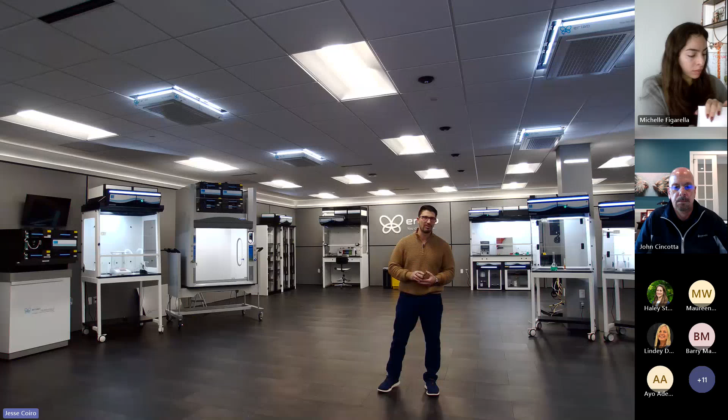I promise this is not going to be death by PowerPoint. We're just going to be as authentic as we possibly can be. But first, I want to make a quick introduction. So Jesse Coiro, Erlab, been with the company about 14 years, director here, and really have focused my career on contamination control and environmental control services.

So what Erlab does is we provide contamination control solutions for the protection of laboratory personnel through the power of filtration. So everything you see behind me within our Inspiration Center is powered by filtration, meaning there is no HVAC necessary within the building at all with any of our products. So independent, completely flexible, and provide solution wherever the chemical needs to be within your organization. Some key benefits to this technology obviously is the flexibility. It's not tethered to the building's infrastructure, and the sustainability aspect.

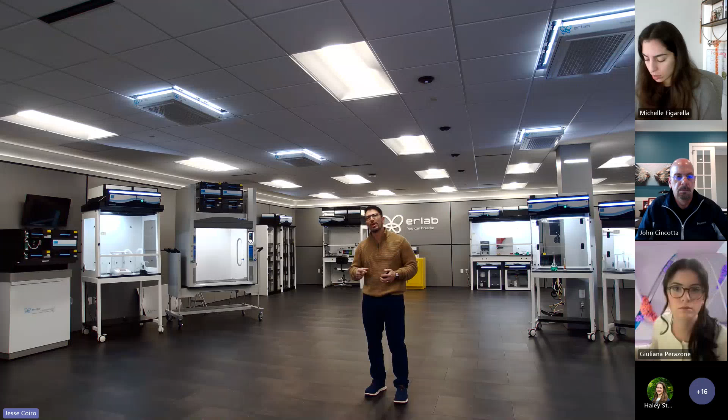Why sustainable? Because we're conditioning the air that you're already bringing to your facility, and we're capturing at the source within molecular filtration or within our HEPA filters. And we're not throwing that polluted air out into the environment and therefore having to remake up already conditioned air, which is extremely costly. Our biggest product that I want to talk a little bit about today specifically is our ductless filtering fume hoods.

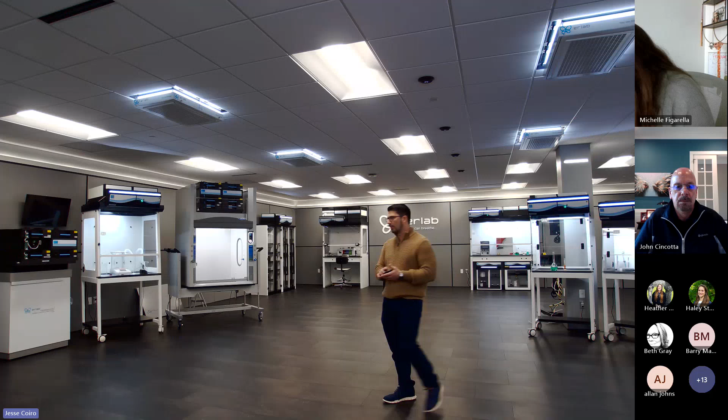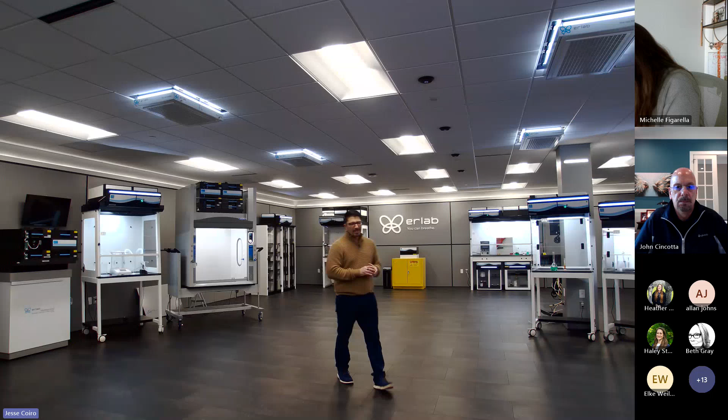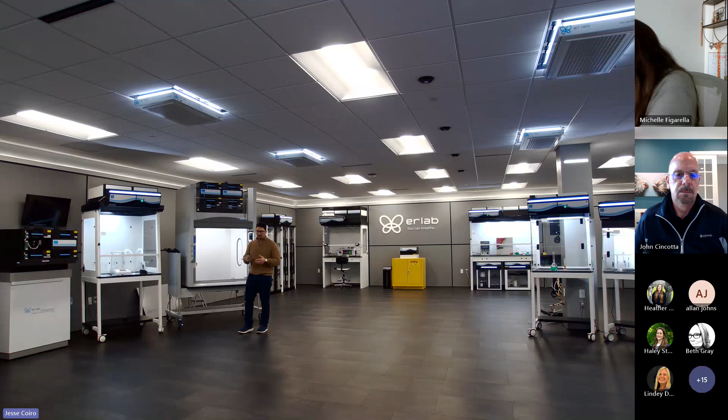Fume hoods themselves consume about 3.5 times of US homes. Filtered fume hoods, however, reduce the energy consumption by about 94% in energy and your overall CO2 emissions. So it's extremely sustainable. Many people think that filtered fume hoods aren't safe. There's a big misconception there. And the reason being is because we bring air back into the laboratory that we're conditioning, that we're working on chemicals at the source. Again, one of the misconceptions is, well, how can you guarantee safety? Safety is absolutely guaranteed with our filtration technology because we've been doing this for 57 years.

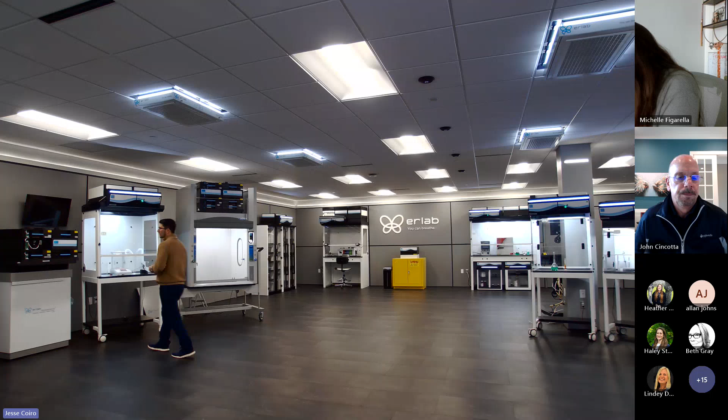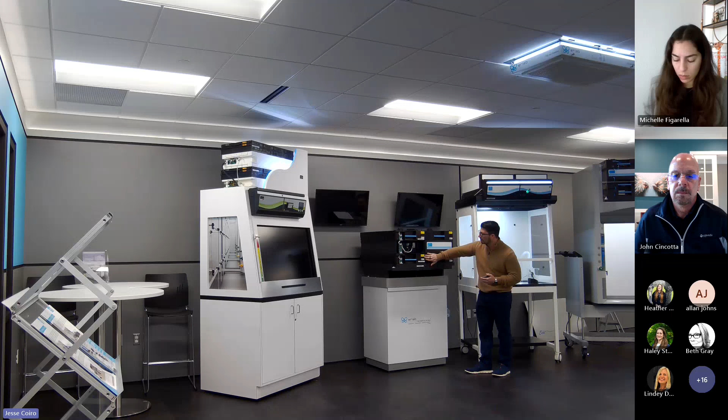I'm going to bring you over to the filtration columns and the stacks here to show you exactly how these are integrated. Sorry, I couldn't see myself on the screen. So again, one of the misconceptions is, well, you're bringing in polluted air, you're capturing it in the filters, and then how can we guarantee that what's entering that laboratory is safe? Well, with Erlab proprietary filtration technology and detection and communication capabilities, we have the ability to handle a broad range of chemicals. We have a primary filter layer. We have a fan module system, and inside this system, we have sensing capabilities as well as communication capabilities. Then we have a secondary redundancy layer of filtration.

What we don't see here is potentially a HEPA filter as a primary source of filtration, or a secondary HEPA filter in the event that these hoods are stored in a contamination controlled environment so that we don't compromise the integrity of the cleanroom. Now, when we capture chemicals, we always want to capture it within that primary cartridge. We want to detect after that primary cartridge, and we want to have that secondary filter really as a buffer in the event that there's any breakthrough, but we never want breakthrough to exist.

So the way we detect that is we have dry contact metal oxide sensors. We detect VOCs, formaldehyde, and or acids, or a combination of all three, depending upon the technology. In the event that we see a spike in concentration past this primary stage of filtration, we're detecting it within our sensors. And we guarantee that even at detection phase, they'll never be released exceeding 1% of the threshold limit value at the filter's exhaust.

Now, how do we do this? Well, we have a list of over 700 chemicals we've tested under 6 different concentrations twice. It represents thousands of chemicals. Not only do we know what we can retain, we know down to the molecular gram of those chemicals we can retain before we see release not exceeding more than 1% of the threshold limit value.

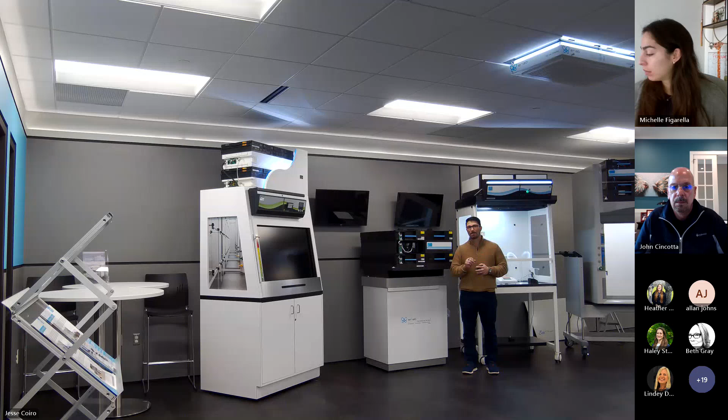Hang on one second, Jesse, you got muted. I can't unmute you. No, no, I can't hear you. Are you able to unmute from your side? Hmm. Is that better? Yes, there we go. All right, I don't know how that got muted. Apologies. So I don't know where I left off, Heather, if you could help me. Oh goodness. So it was testing. Perfect. I failed my test. All right, I'm going to start back on the feasibility study. You were talking about chemicals, the chemicals we can't retain.

Okay, so I was talking about the chemicals we can retain, but more importantly, we also know what our limitations are, and it's 13 chemicals. Those that are normally gaseous under normal temperature and pressure conditions, or noble gases. After that, it's about the overall quantity of chemical that's being used. We can handle about 80% of the applications within laboratories today. It's really about overall volumes, and we work with our customers to help understand what that application is and reduce their overall volume and usage of the chemicals.

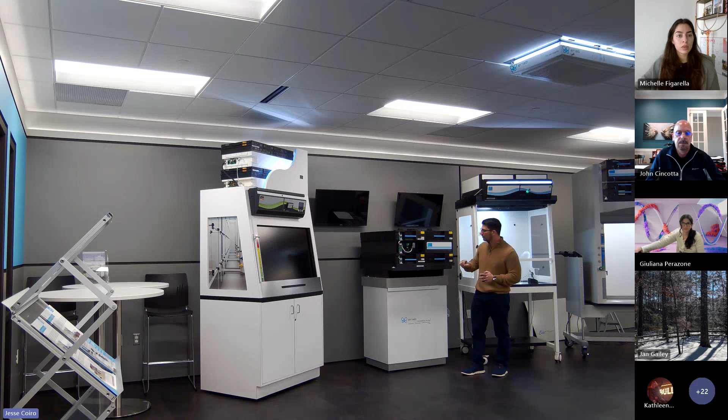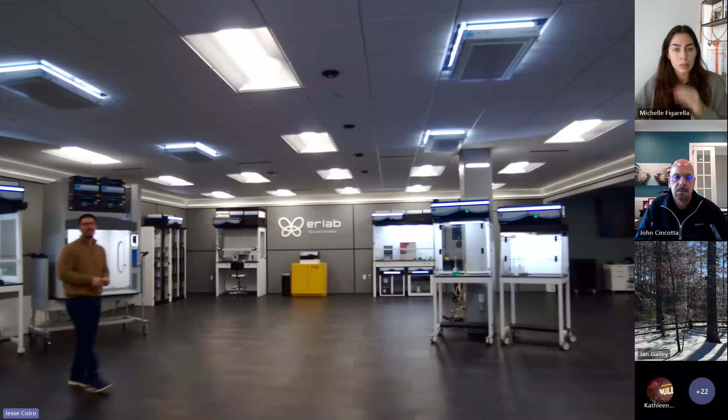It's important to note that when you replace the filters, the primary filter is the filter that gets disposed of, that gets removed. The secondary filter rotates down to become the primary. The new filter becomes the secondary. So that's the safety aspect of the technology and how the filters work and how we're able to guarantee your safety. First and foremost, if this product wasn't safe, then what good is the product at the end of the day?

In addition to the fume hoods, now we know we have a hierarchy of controls. We want to separate you from the hazard. That's a containment device, an engineering control device, such as a fume hood. We have many different products, as you see, many different fume hoods. We have our standard, what's called our Captair structure, single wall constructed fume hood. You have what we call a reversal sash. So not your standard research grade fume hood, but it does the job for the majority of applications.

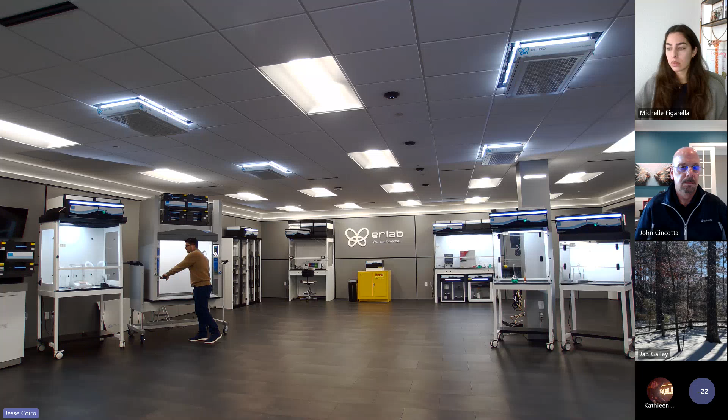We also have partnerships with Labconco where they integrate our filtration technology above onto their superstructure called their Echo and Aero. And this gives you a traditional sliding sash. You have your gooseneck faucet, your sinks, gas, water in the back. So there's a lot of different things you can do.

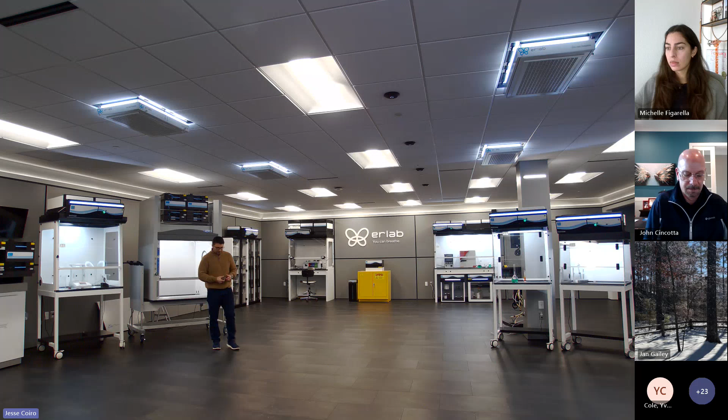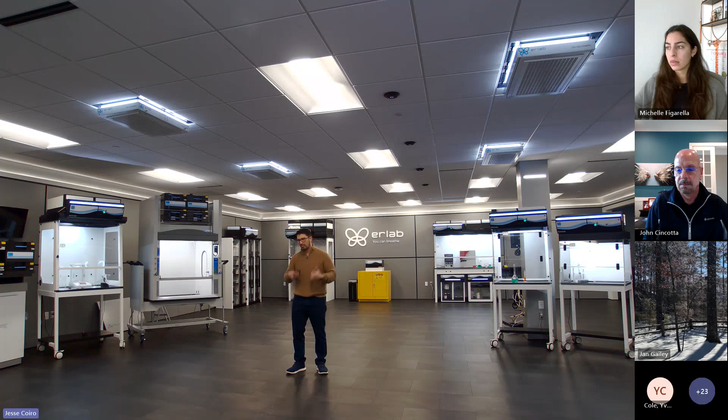Now, earlier I mentioned providing protection wherever the chemical exists in a laboratory. Well, as you see, we have a number of different solutions. Above me, that little device called the Halo, hence the halo of light around that product. That is designed to mitigate the risks of fugitive emissions in a laboratory by providing continuous filtration and adding what's known as equivalent air change rates in your room.

Sorry, somebody just asked a question about OSHA requirements. I'll touch on the safety standards in a moment.

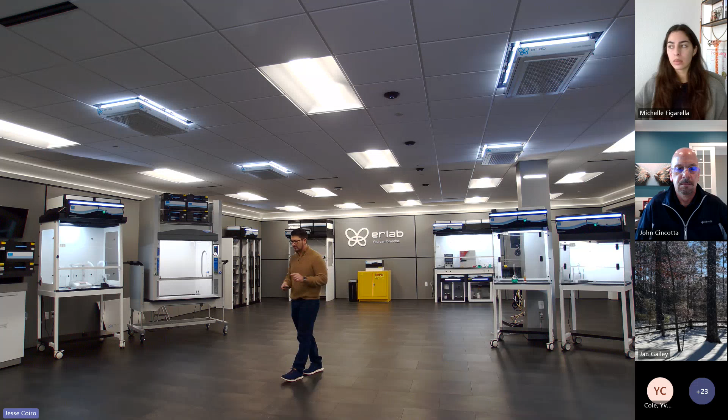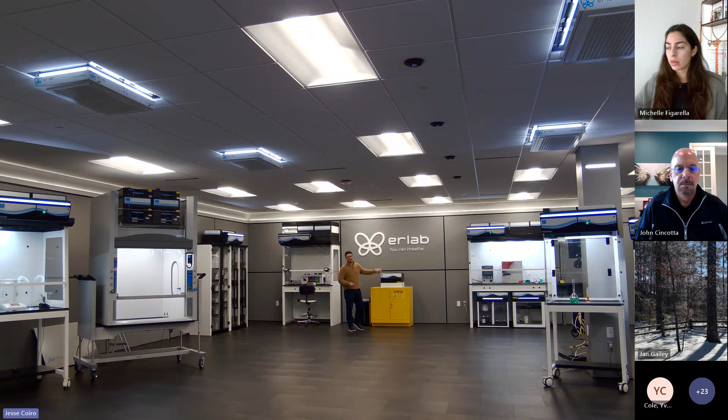Then we have filtering storage cabinets, devices, and we have what's known as an integrated solution on flammable or acid cabinets known as the ChemTrap. This integrates onto any existing acid or flammable cabinet in your facility, and it constantly filters out the emissions in that cabinet. We know those are the most stagnant chemicals in a laboratory. When you open up those cabinets, you're inundated with emissions. Now, we know the EPA is setting strict guidelines, especially for DCM, methylene chloride, where

Jesse, you got muted again. I don't know why that keeps happening. That's okay. Sure. Anyway, no worries.

Here we are. So again, EPA regulations are extremely strict, right? So before, methylene chloride, DCM, had a TLV of 50 ppm or 25 ppm, depending upon the guidelines of the country you're in. Today, as of December of 2024, the EPA states that you can't be above 2 ppm. So we've got to do everything we can in the laboratory to reduce our risk to these chemical exposures. We have to go far beyond compliance.

I've done seminars talking about OSHA, NIOSH, ACGIH, and the different levels of standards and the TLVs you can, quote unquote, be exposed to for 8 hours a day throughout your working life. Unacceptable. We have to go well below compliance. Proof is what the EPA is putting in place now, and they're testing about 20 other different chemicals as we speak. So it's very critical to provide these types of solutions throughout that laboratory. Mitigate the risk of exposure. It's what we do.

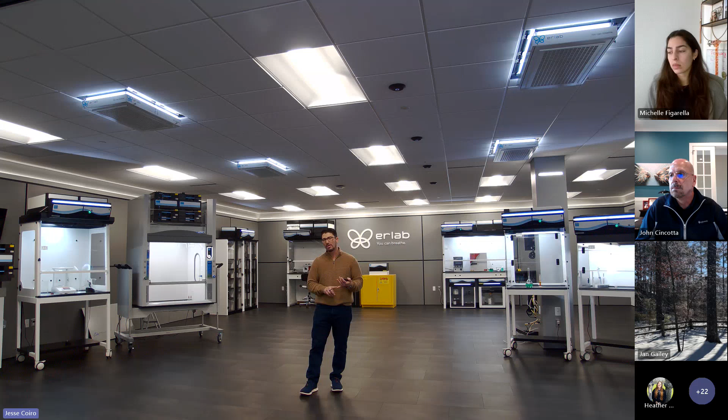If the door is left open, filtration is detected as breakthrough of fan, all the products are going to constantly monitor and detect. Now, as far as safety guidelines that we adhere to, it's SEFA 9, ANSI Z9.5, AFNOR NFX 15-211, NFPA 45 2019, 2024, 2015, 2009, depending upon what the AHJ is pointing to, and CSA Z316. We comply fully with all those standards, and those standards are mainly specific to fume hoods.

Now, how do we comply with those standards? It's very important. Again, we have two different structures here, single wall constructed hood. Sash is a bit different than your sliding sash. It does not close all the way. So in order to comply fully with the NFPA 45 standard, you would have to go with the lab combo structure because it has the fully sliding sash and the dual constructed walls. After that, it's really about the structure. Not every state points to NFPA as a standard they would like to adhere to.

So again, many solutions through filtration. It's easy to install. There's no infrastructure cost. It provides a safer solution throughout the laboratory, and it's extremely sustainable. Again, why sustainable? Because we're keeping the conditioned air back in this very same facility that's typically throwing that conditioned air out. And Kathleen has a question.

Yes. How do you dispose of the filters? Like, do you have to have special equipment? Do you have to wear special gloves, since it's had all the chemicals? So quick question, standard PPE, and then the filters themselves should get incinerated. So we have contracts with Triumvirate, Clean Harbors, Veolia. They'll take our filters and they'll send them to an incinerator. Now the customer can ship the filters back to us, or we can provide the service, bring the filters back, or the customers themselves have their own environmental waste stream that it would go through. But the proper means of disposal is through incineration.

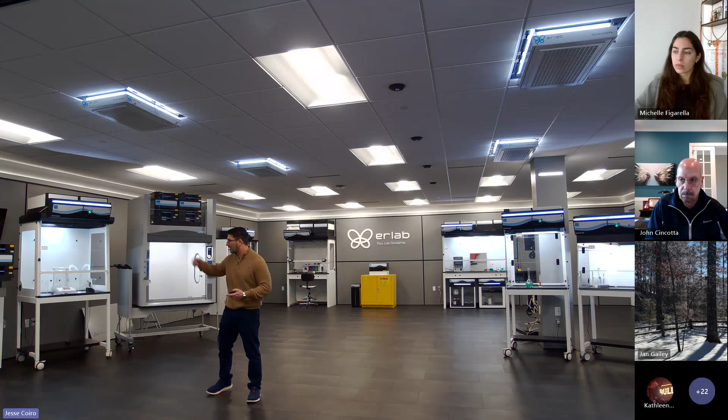Now, we do create a zero carbon footprint within our filter manufacturing from cradle to grave. So the organic media inside these filters is coconut shells. We harvest the coconuts. We then use the husk of the coconut. We activate that coconut through high heat and steam. That's now activated charcoal. That activated charcoal then goes in the filters. The filters capture and contain the chemicals. We don't throw that pollution out into the environment in wasted air. Then that filter, once used, gets incinerated.

And Kathleen has another question. Oh, no, I don't. Oh, you don't? Thank you. Put your hand down. Just kidding. Any other questions? I can't see all of that. I only can see screen one. So if there's any other questions, Heather, can you help me out there? Because I can't see everybody on the screen.

Absolutely. I know that there was one a few minutes ago, but I think you did explain it. Someone said, please explain TLV to make sure everyone understands what this means. And to reiterate on that, it's the threshold limit value, it's what you can be exposed to 8 hours a day throughout your working life, so for 40 years. That's the threshold limit value that they say you can breathe and be exposed to. Again, that's the compliance. We've got to go well below that, such as what the EPA is doing and cracking down on these regulations, as they should.

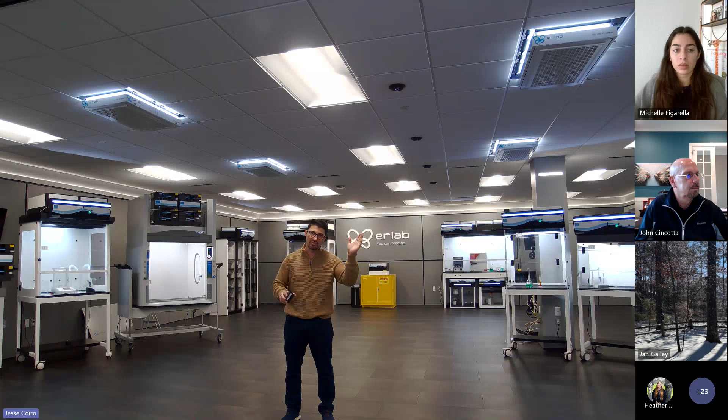It's factual information that a lab technician who spent their life in a lab, their life is reduced by 10 years. It's like smoking packs of cigarettes. You can't see the chemical emissions, and most people working in a lab can no longer smell it. Your olfactory sensor is wasted. It no longer can detect or trigger, hey, there's a problem. Therefore, you don't know there's a problem. That's the problem with the air we breathe, right? We can't see the majority of pollution. Yes, if you go outside in a city, you can see the haze, but inside, you generally cannot see air pollution.

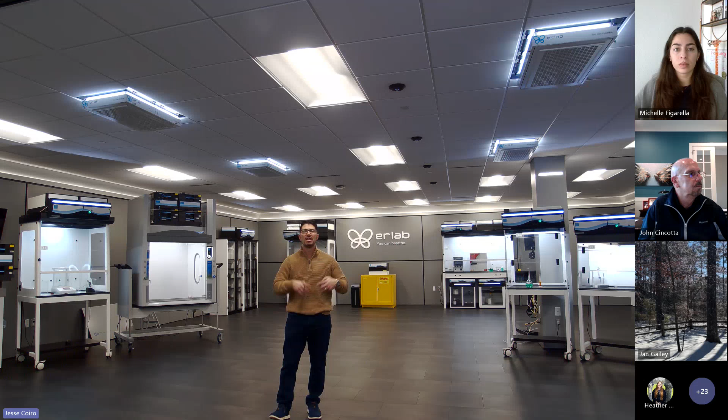So we want to do everything we can to mitigate the risks associated with pollution inside of a lab and even outside of a lab. We have a whole comprehensive indoor air quality solution where we actually have sensing and software technology that will give you an overall wellness building score, how well and how healthy is your building based on TVOCs that we've detected, CO2, PM2.5, NOx, and we perform an algorithm to give you an overall building wellness score.

It is critical. We wouldn't drink polluted water. Clearly, right? We need to treat the air the way we treated the water. We got the Clean Water Act. We now need to have an Air Act so we can breathe fresh, clean air and be healthier. I've spoken to so many lab technicians over the years, and they've now experienced headache, rashes. They're now asthmatic. The list really goes on, and those are just the minor symptoms.

It goes as deep as cardiovascular disease, liver disease, cognitive incapabilities, neonatal disease. There's a lot of things that the air causes within our bodies, and we must do better inside and out. We can't continue to dump out and pollute the world.

Sorry, I thought somebody was asking a question. So anything else, Heather?

How easy are these products to install? Good question. So the hardest product to install is the Halo, and when I say hard, it's like a lighting fixture. So you have to tie it into the building's electrical. It needs to be hung from the ceiling with Gripple wire or threaded rod. After that, everything else comes to the facility, with the exception of the lab combo hood. It comes as it is.

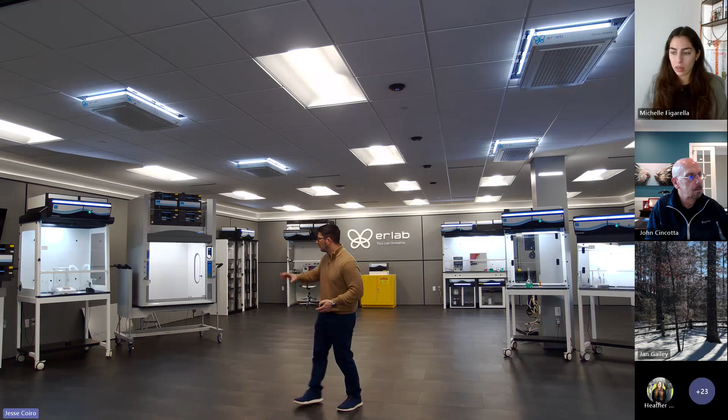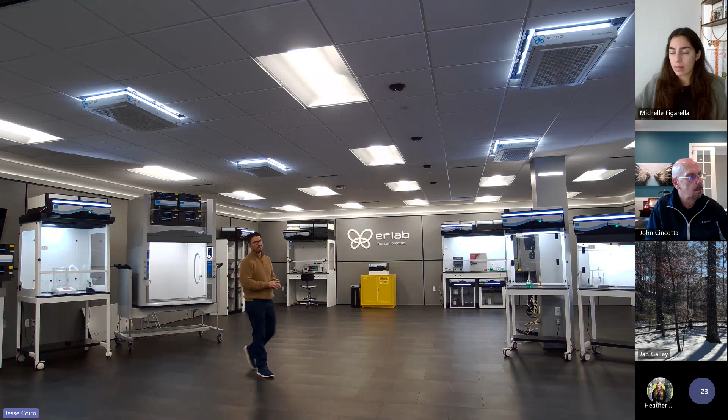This becomes a little bit complicated. Just make sure you have the proper width in the doorways. But the rest of the product you see here comes completely knocked down and can literally be set up and erected in minutes. You can build a whole fume hood within a half an hour. It's really that simple. So there's really no restraints as to where this product can fit within the facility.

You talk about energy savings. How is this quantified? Quantified several ways. So we have a calculator. So we have to understand a number of things: the thermal load, the CFM, the cost per CFM, how many fume hoods, what's the total operating hours, and we perform an algorithm based on all of that information and give a baseline of what the savings is we think we're going to be able to provide, plus the CO2 emission reduction. After that, we've done several case studies.

If you go on our website, Thomas can provide you with this information. We have several case studies proving that we've been able to provide facilities with LEED certification, ZNE. Filtration is the cornerstone to these buildings achieving these energy efficient marks. It's critical. Again, it's extremely hard to achieve, if not impossible to achieve, in a fume hood intensive lab when it's all ducted fume hoods.

We've worked with Bristol Community College, first ZNE laboratory. They were going to design a high efficiency LEED lab, came out after they did their calculations and determined it's not going to work with ducted fume hoods. In fact, the hoods, 17 of them, just 17, were going to consume over half of their PV arrays.

Hoods are very high energy use intensive products within the laboratory. It's fume hoods and it's -80s. Those are the two biggest beasts in the labs. And number one is fume hoods. Again, 3.5 times the amount of energy of U.S. homes. That's what one ducted fume hood equates to. And that will vary a bit if you have low flow hoods versus a CV hood, VAV. You're still throwing air 24/7. You're still throwing air, and air costs a tremendous amount of money.

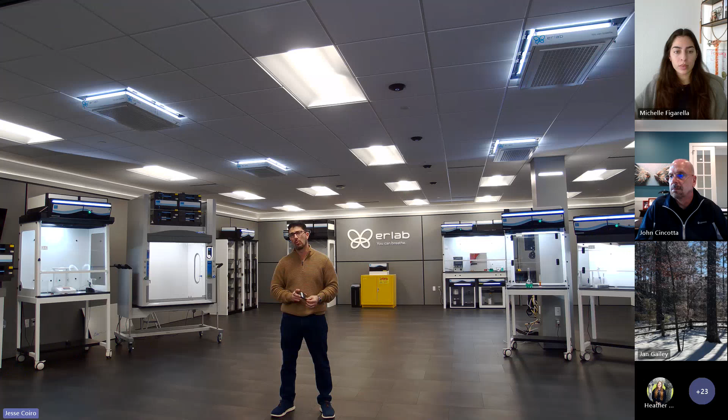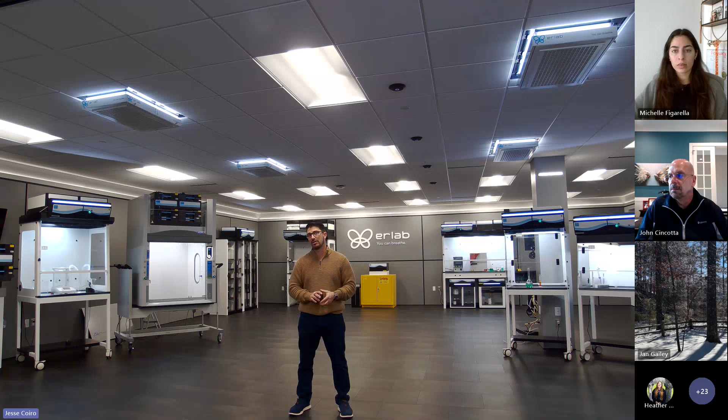Great question. Yes, we can handle formaldehyde, and we handle formaldehyde quite well. We can handle about 220 molecular grams of formaldehyde before we've seen that release at 1% of the TLV of 0.75 ppm. So we have to be 0.00075, if my math's correct, ppm of detection of formaldehyde. So we can handle it, and we handle it quite well. And we have many applications using formaldehyde, especially histology and pathology facilities.

And what you don't see behind me are the custom solutions that we have. These are all standardized products, but we can create completely customized solutions, downdraft tables, backdraft tables, larger walk-in hoods or floor-mounted hoods. A lot of different things you can do. Filtration makes that lab and makes everything possible. It's very versatile.

There were a few more questions that came through. They came through so fast I did not read them. So Heather, if you can help.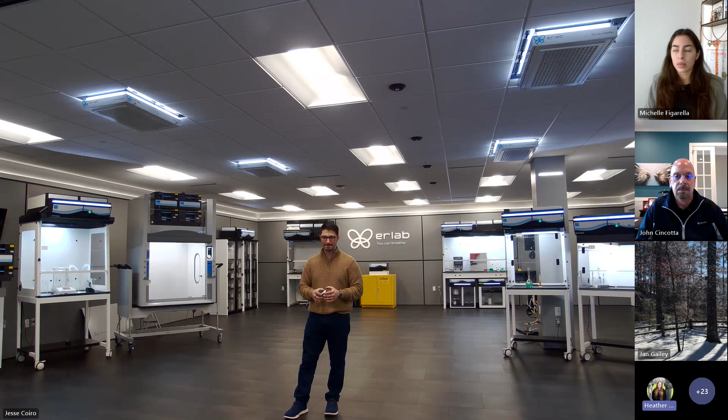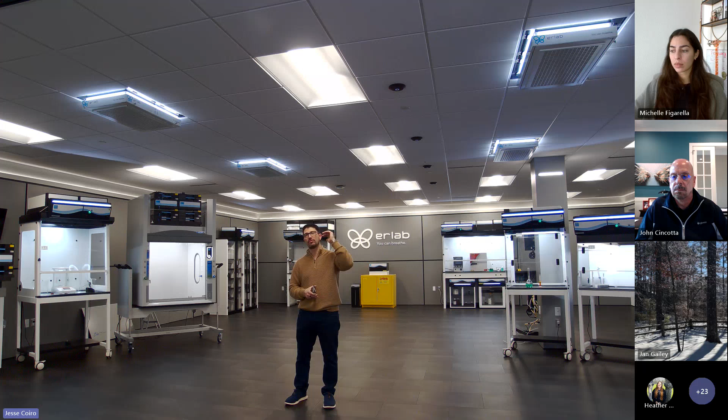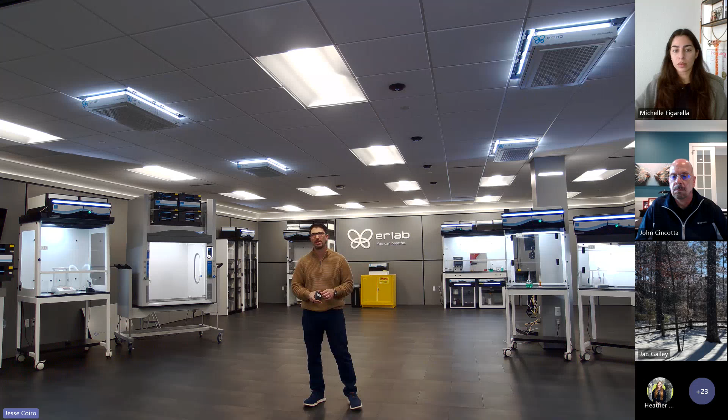Absolutely. How often do you need to change the filters when working with animals, hair or bedding? And are those devices not usable for such work? So they are. So that would be a HEPA filter. And then with the HEPA filters, you would have a carbon filter above the HEPA filter for the ammonias. But typically the HEPA filters would be changed out every 2 years, every 3 years, again, depending upon load of contaminants that HEPA filter is picking up. But the fan's going to detect a static pressure drop.

Now we do have transfer stations, we do have bedding stations. Again, you don't see them here. Those would be customized solutions. As of right now, we're getting close to standardizing all those types of products. Good question.

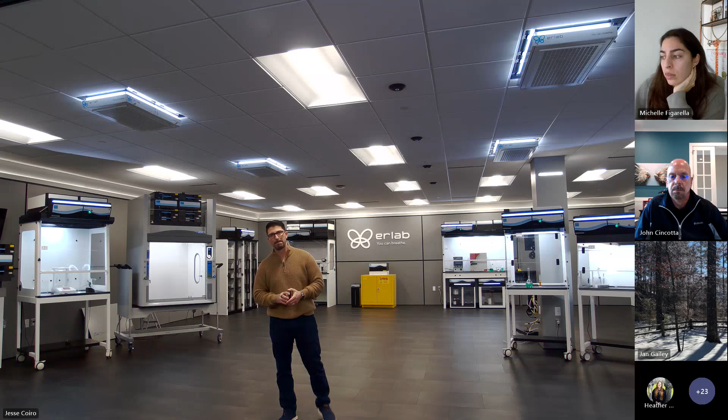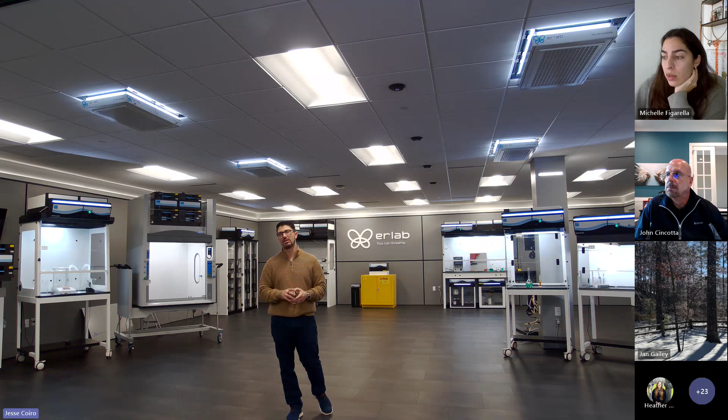What are the filters' capacity and how often do I need to replace them? Capacity depends upon the chemical handlings, right? So remember that feasibility study? Don't know if I was muted at the time I talked about that, but it's based on that chemical application assessment form, and that will determine the overall capacity of that filter. It's what type, how much of the chemicals that we're capturing at a time throughout a year. Typically, it's 24 months on the carbons. HEPA filters, again, between 2 and 3 years.

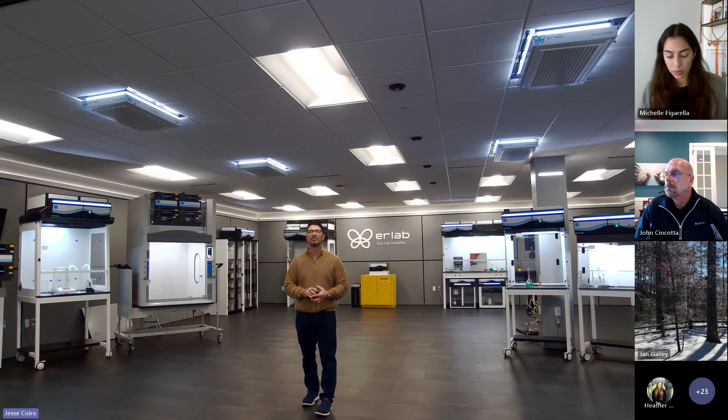HEPA filters are much easier. They become more efficient as they get loaded. The fan just can't handle the pressure drop. Carbon filtration is much more challenging. They do not become more efficient as they become loaded. We certainly don't want any breakthrough. So it's a very delicate balance of how much air we process through those filters, how much chemicals we're putting through those filters, and again, what the exposure rate is past the filter's exhaust.

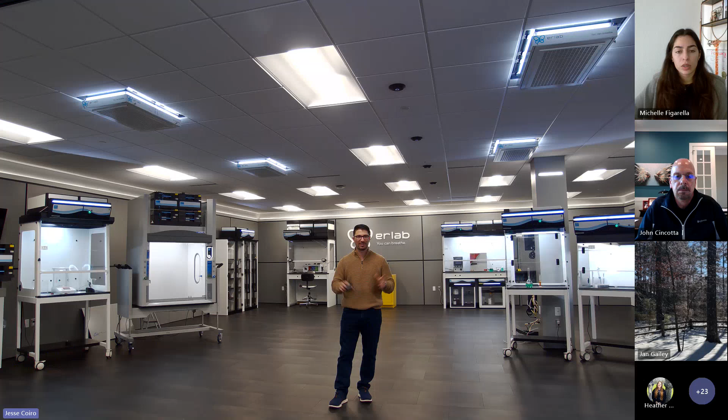Excellent. Well, I think we're spot on, right? We used our time. So again, just did it a little differently. Didn't want to do death by PowerPoint. Sorry for the continuous mute. I don't know. My controller does not have a mute button, so whatever, it doesn't matter.

Certainly ask questions, reach out to your Thomas rep. Really to summarize everything, safety through filtration and sustainability. That's really what we do and have focused on it for well over 55 years. So we are the experts in this technology and would be happy to have further conversations with anybody that's interested.